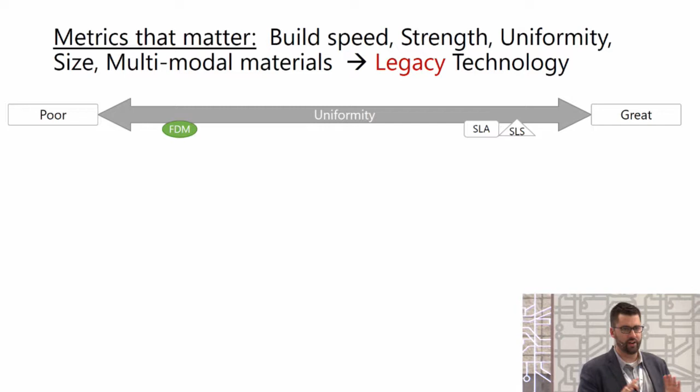So how do we prove that it's useful, and what are the advantages of FDM? We've ranked a few of the primary industrial 3D printing technologies on a spectrum from not great to great. So we look at FDM, SLA, and SLS. There are other technologies out there, and a lot of them are really great, but these are the big ones, especially in the polymer space, so that's what we're going to talk about today.

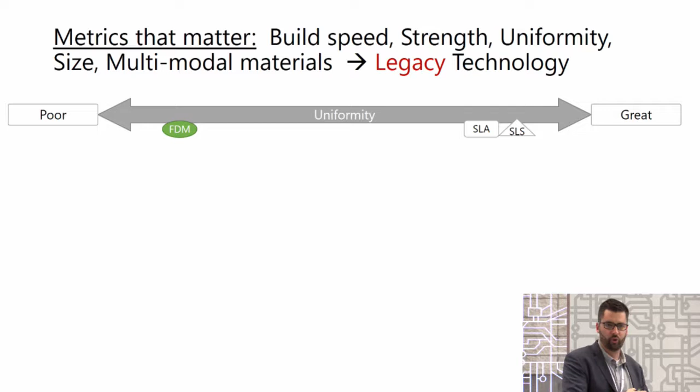Let's start off with uniformity. When I talk about uniformity, I'm talking about whole part uniformity. You can start out with a really strong material like carbon fiber filled polymers, but if that joint's not very strong, then it almost doesn't matter how strong the base material is, because your part is not very uniform. These other technologies have gotten a lot more advanced in their ability to produce a more uniform part. I'm not going to call it an isotropic part because it's not, but it's more uniform.

Then there's a host of other metrics that the industrial user really cares about, everything from strength of the raw material through to improved resolution, multimodality materials, build speed, and print size. I've ranked the technologies as our worldview, how we look at the additive manufacturing world. So FDM's pretty good on a lot of those.

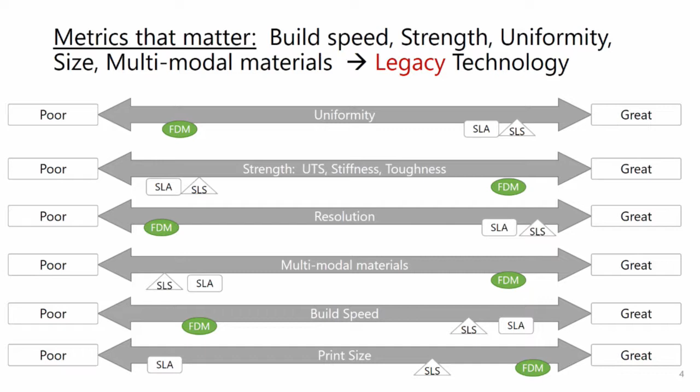If only we could get that uniformity up, then I could print structural parts. I could print engineering grade parts with engineering polymers that are used in injection molding and other processes with FDM additive. Wouldn't that be nice? For us, functional strength means isotropic parts in the whole part. I'll tell you how we're able to do that and what it also means for ESD and EMI.

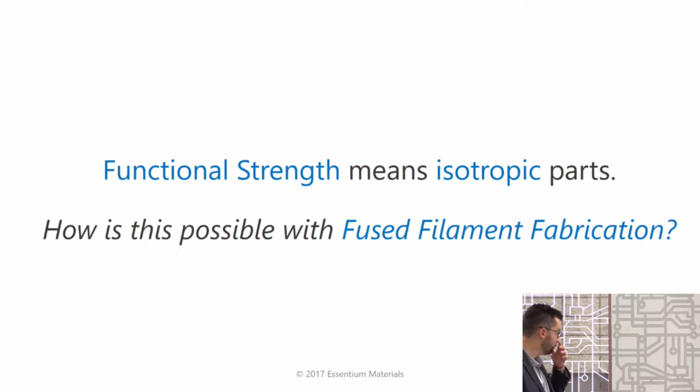But to start off, what I'm going to do is show you a little video of FlashFuse, what FlashFuse is and how it works. And that'll explain how it's possible with fused filament fabrication.

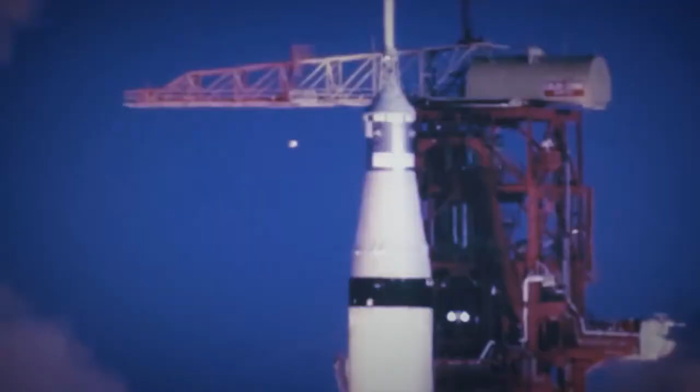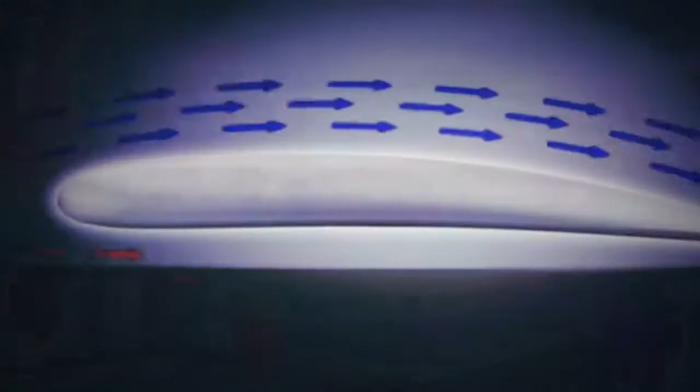History has always been driven by invention. From the making of fire and the design of the wheel, to the Gutenberg press and the cotton gin. From Thomas Edison's light bulb and the Wright brothers' first flight, all the way to the miracle of landing on the moon. None of it could have happened without imagination, a good amount of courage, and the belief that things can be better, that nothing is impossible. The greatest inventions to transform the world didn't just happen overnight. They each suffered through thousands of failures, mistakes, and missteps, until that one day when somehow the magic happens. Edison finds the right design of an incandescent bulb. The Wright brothers found the perfect balance to control an aircraft, and a new world of possibilities was born.

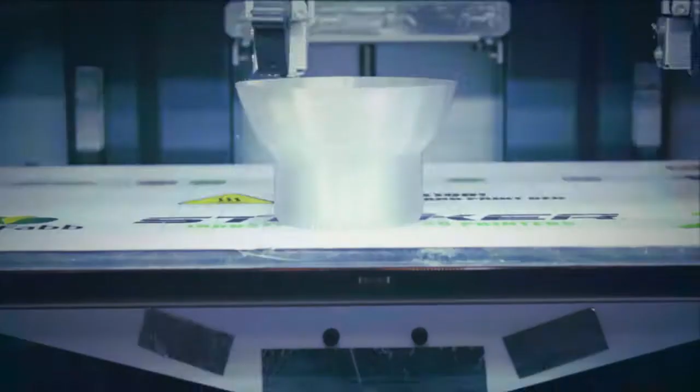Today, we stand on the cusp of the next industrial revolution, driven by the invention of 3D printing.

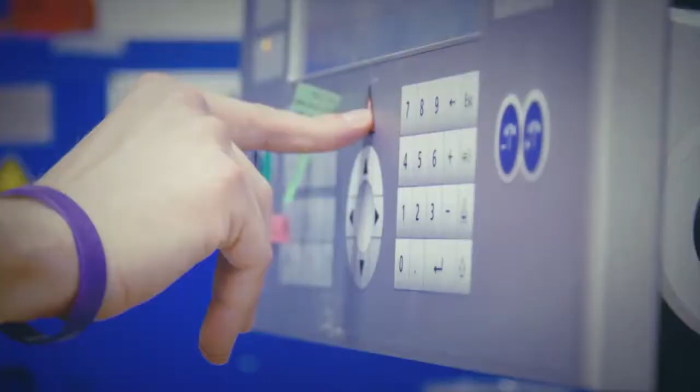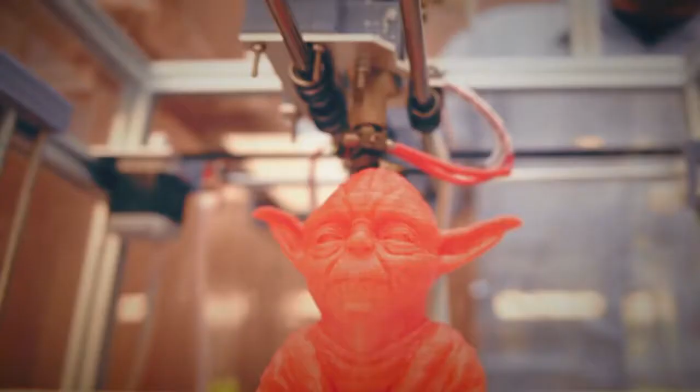In the world of 3D printing and manufacturing, we've got our own set of obstacles to face. One of them is structural strength. With 3D printing, you're laying down thousands of layers of material. Often with more complicated designs, interlayer strength just plummets. Until we solve this problem, 3D printing is doomed to remain relegated to weak prototypes and trinkets like Yoda heads and Eiffel Towers.

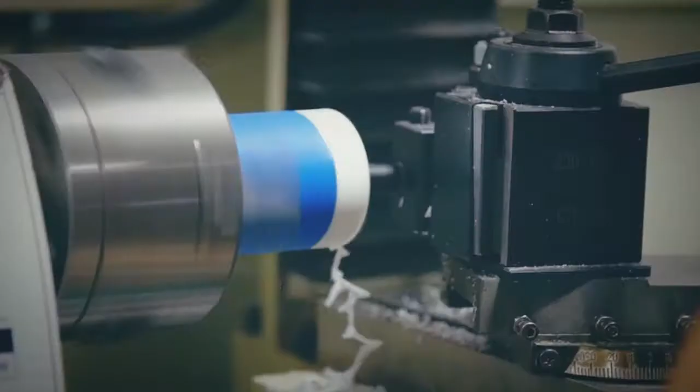So how's it work? Well, it's a two-step process. First, we coat the filament with a thin layer of highly conductive carbon nanomaterials. Next, using our patented flash fuse technology, we use electromagnetic waves to excite the particles in that thin layer, causing

the layers to react and heat up rapidly. This heating allows the layers to weld together. So what does this mean? We now have the ability to weld an entire printed part together during the printing process, achieving up to 98% the strength of an injection molded part. No post-processing, you take the part off the printer and it's ready.

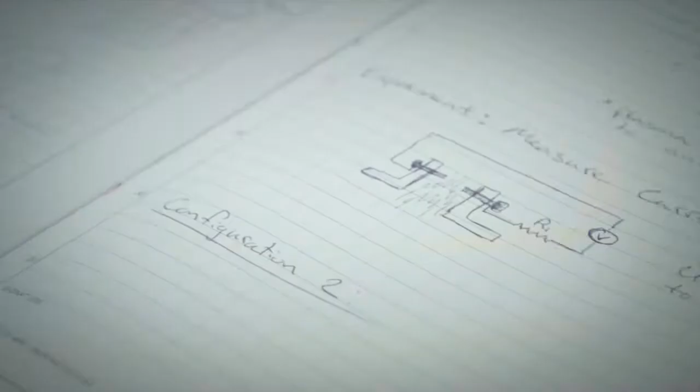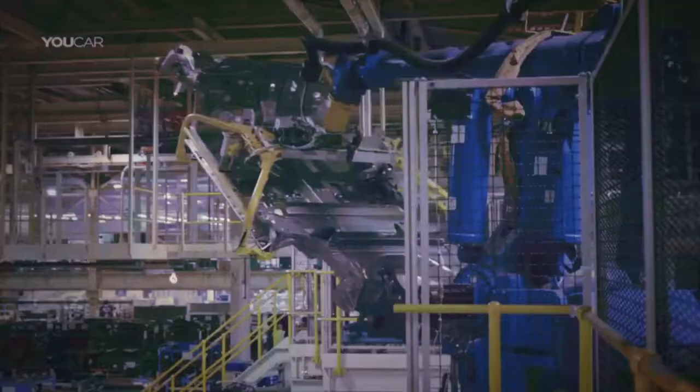We provide a new level of strength never found in a 3D printed part before. Isotropic properties comparable to those in injection molded parts. The uses of our product are game changers for the automotive, aerospace, medical, defense, and petroleum industries, all of which depend on practical parts that must be used in production. The future is here. The possibilities are endless. So let the revolution begin.

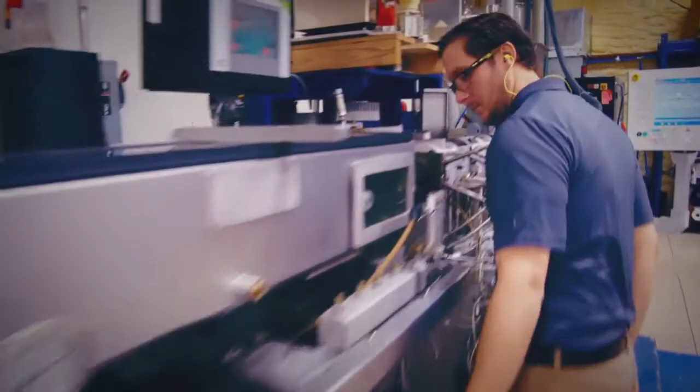All right, so now that you've seen it in kind of graphical form, how does it really work? That's probably the next question. Again, we're addressing kind of this age-old problem facing FDM printing. And that is, particularly under fatigue or impact loads, those poor interlayer bonds don't produce a strong enough weld in between all those layers. So again, this has limited the application for FDM additive, and it hasn't been able to really achieve the potential offered by the materials that FDM additive can really capitalize on.

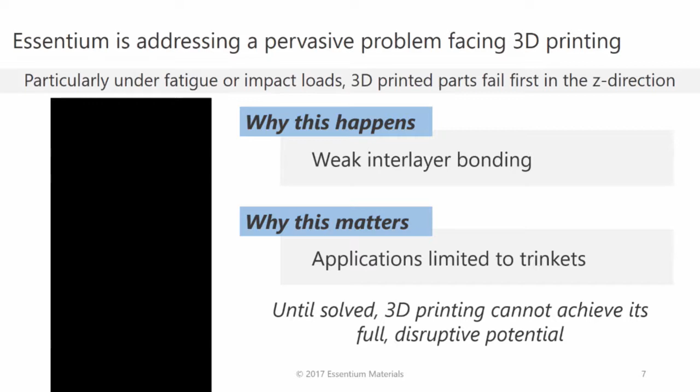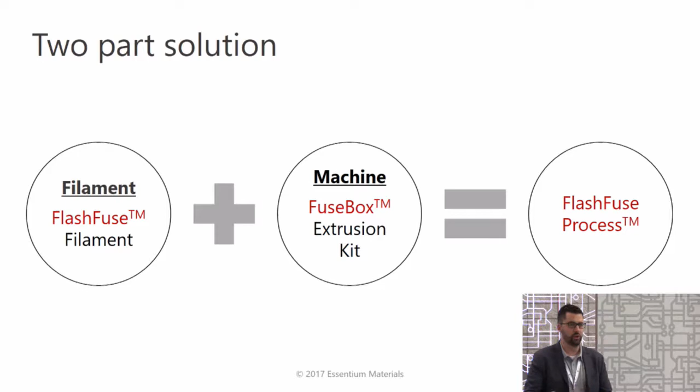So our solution is a two-part solution. One, we start out with a whole lot of material science. We make those materials electrically conductive, which allows the ESD and EMI shielding applications, and also provides the fundamental underpinning for the mechanical property improvement. And then we add that FuseBox technology. It's just like a chipset that goes into a computer. The FuseBox goes into the printer, and it unlocks that mechanical welding capability.

So let's start with the materials. We take monofilament, kind of in the upper right-hand corner. We coat it with a carbon nanomaterial composite coating. The polymer matrix is the same as the base polymer. And then we 3D print a part, and so you're looking at a nozzle cutaway here. And so the polymer just goes through extensional flow, and you don't get a lot of mixing in between the outer layer and the polymer core.

So this is really important for two reasons. Number one, all the mechanical properties that you sort of have in this core here, whether it's just neat, unfilled resin, or even carbon fiber or glass fiber filled polymers, all those mechanical properties are maintained. They're not interrupted by nanotubes. And then the second thing that's really great about that is it keeps your costs down, because all the expensive materials, the carbon nanomaterials, they're just used on the outside in a very thin film.

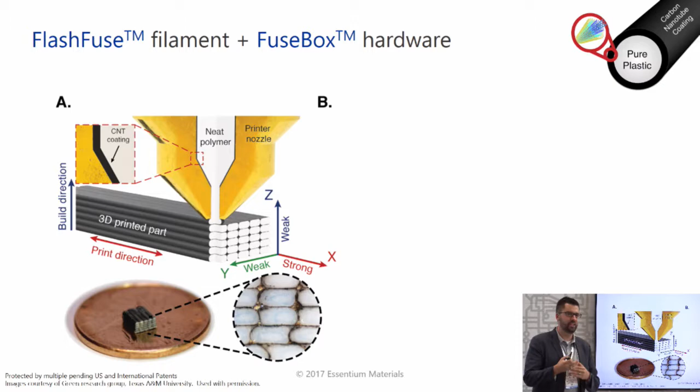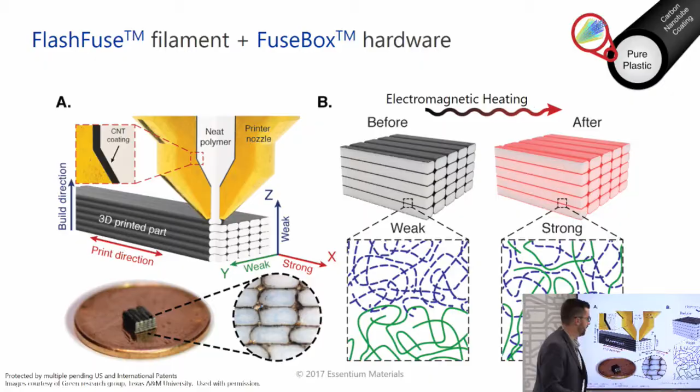So then you can see, even from very small parts, when you take a cross-sectional view, we do not get mixing. So our carbon nanotube composite stays highly segregated from the inner core of that plastic filament. And then while we're printing the part, again, you're building the part up layer by layer, trace by trace, just like a conventional FDM process. But these polymer chains, they were formerly just resting on top of each other because they didn't have the thermal energy to entangle. Now they got the thermal energy right at the interface so that they can cross that layer boundary and entangle.

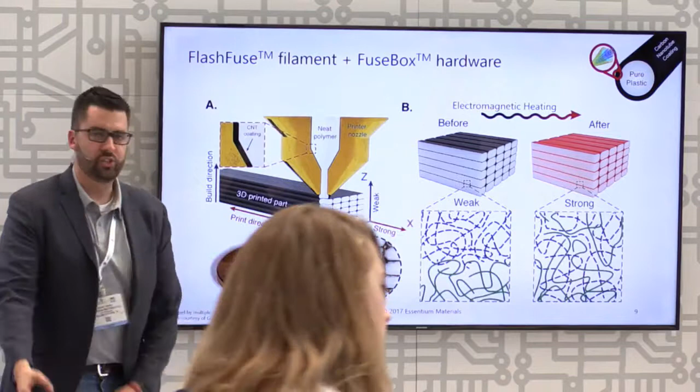This promotes interlayer strength, dramatically increasing the whole part isotropic properties. And here's the secret sauce. This is why this works. This is why this is special.

Our electrical conductivity is 1 billion times higher than the next closest commercially available electrically conductive filament. Let me say that again: we're 9 orders of magnitude more electrically conductive than the next closest conductive polymer available on the market. We've used 4-point probe tests, measured printed parts and filament, and this is why our technology works, because the electrical conductivity is so much higher.

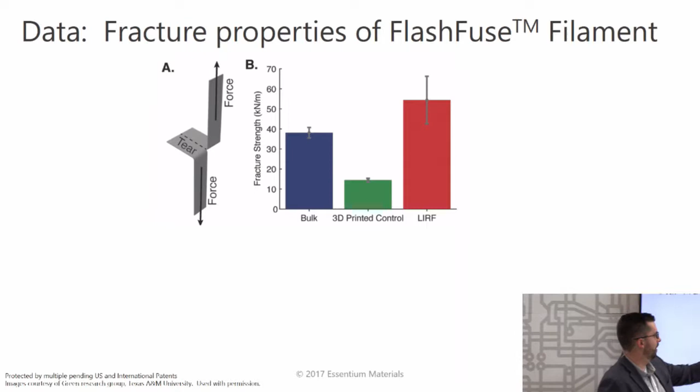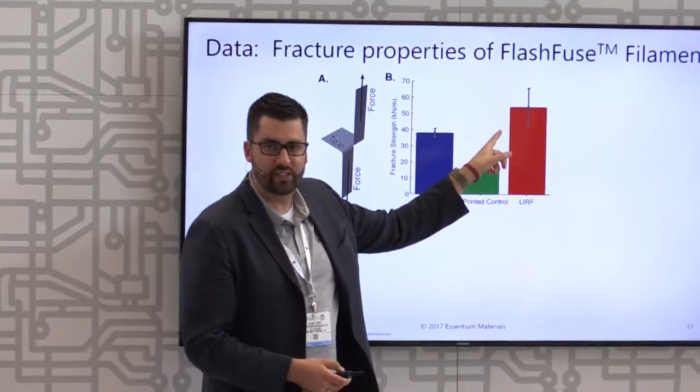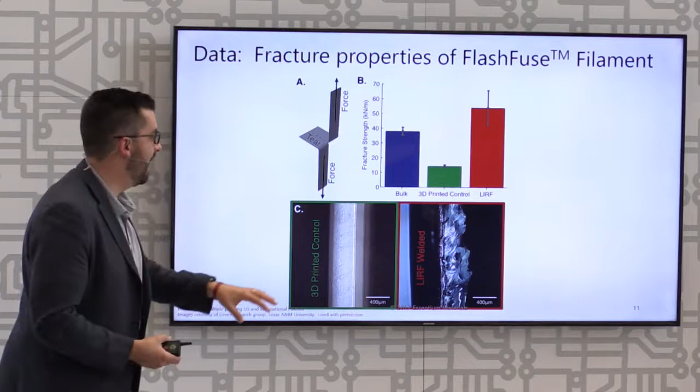So what does that mean for mechanical properties? We look at the mechanical properties between the joint from a fracture toughness standpoint. Bulk polymer has fracture toughness right in this range. 3D printed parts dip quite a lot because of that really poor weld. With our local process of introducing heat at the joint, we get not only improved fracture toughness, we get a taffy type failure. You get increased ductility, increased strain at break, and a dramatic improvement in the whole part isotropic properties.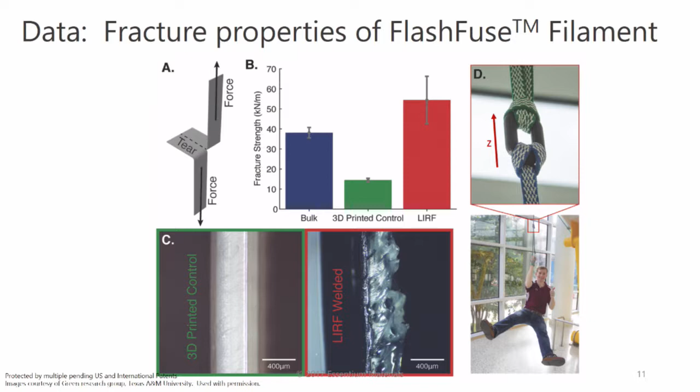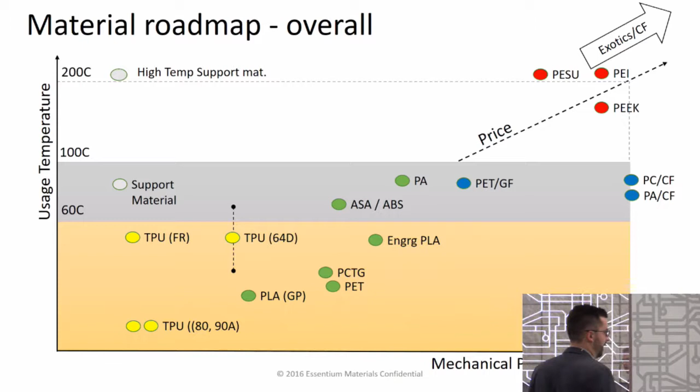So what materials can be used in the process? This is where this gets exciting, guys. It's not just one material, not just 6, not just a couple—it's an entire spectrum. If you go across the right-hand side here, you're looking at mechanical properties increasing. Looking at usage temp, you've got 60C, 100C, 200C, and beyond.

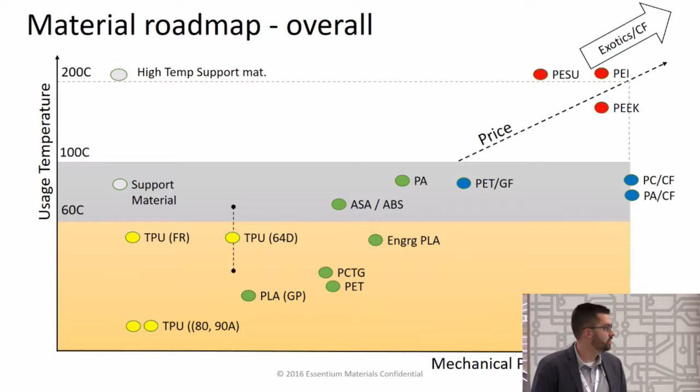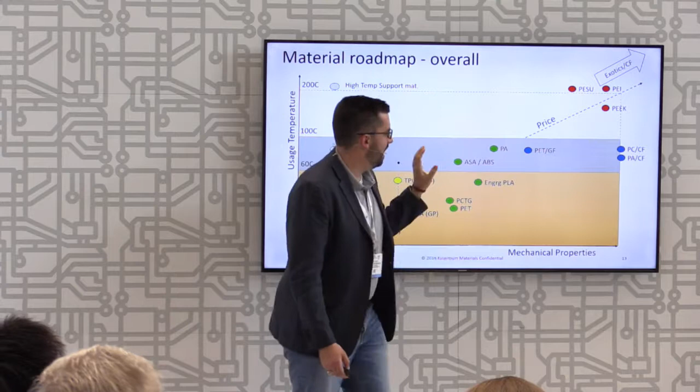Our process works with any thermoplastic polymer because the physics translate. We've got polymers we're working on that are urethane, elastomeric polymers, in 80 and 90 Shore A, 64D, and a really cool flame retardant grade that's already been aerospace certified. Then we've got copolyesters, natural polyesters, styrenics and polyamides, all the way out to glass fiber, carbon fiber filled polycarbonate and polyamide.

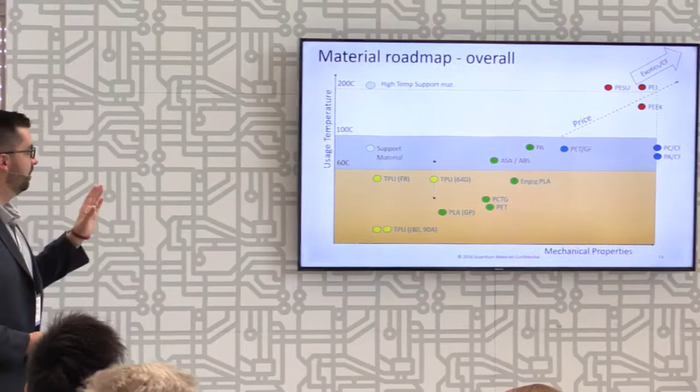And then you start getting into your exotic materials. This is where it gets interesting: PEEK, PEI, PESU, PPS—all those materials can be carbon fiber filled and then carbon nanotube coated, and the entire part can be so much stronger than ever was possible in the past.

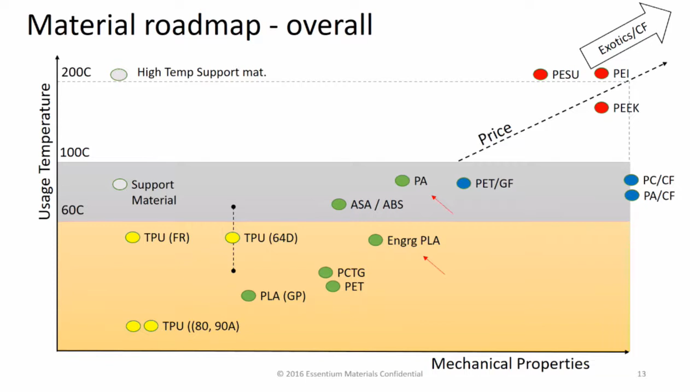The two materials we're launching with are polyamide—a really nice ultramid material from BASF—and an engineering grade PLA that can be heat treatable and used widely in a whole lot of printers at fairly low cost.

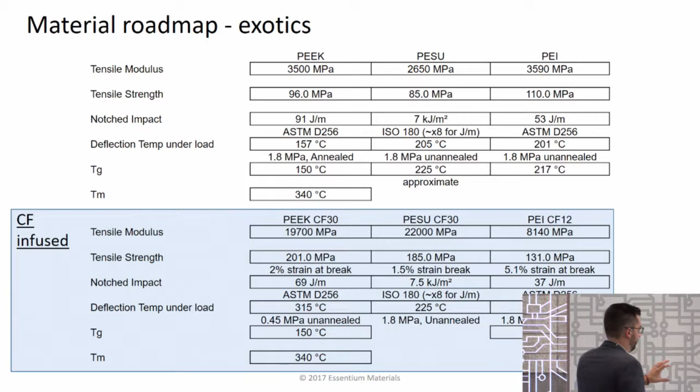So check out these mechanical properties for exotic materials and carbon fiber infused options. You've got PEEK, PESU, PEI, and you can start to have access to tremendously high mechanical properties.

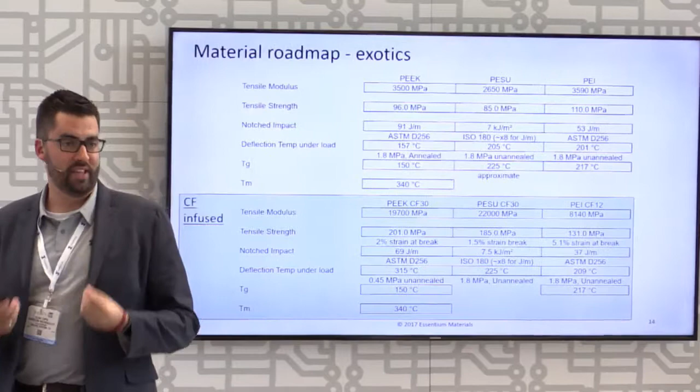By promoting the part isotropic conditions, a whole new realm of metal replacements is absolutely possible using this technology. Once we start looking at ways to dramatically improve the uniformity of the materials, FDM starts to become interesting and competitive, if not exceeding, other 3D printing technologies.

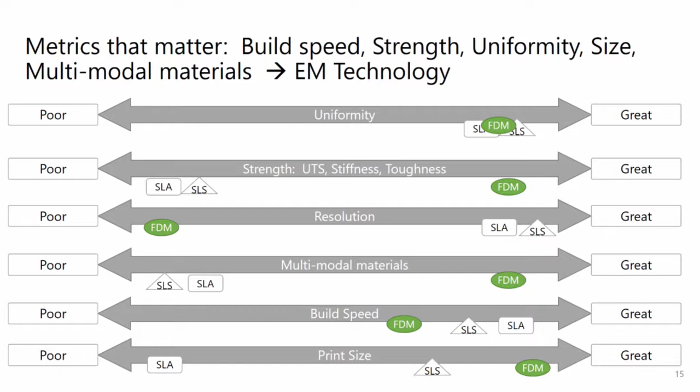In addition, our build speeds can increase because we're preheating, heating with the layer of filament, and post-heating with that plasma-based system. So, use cases.

Let's talk about what this means for electrostatic discharge and electromagnetic interference shielding cases. First, let's talk about what causes ESD events.

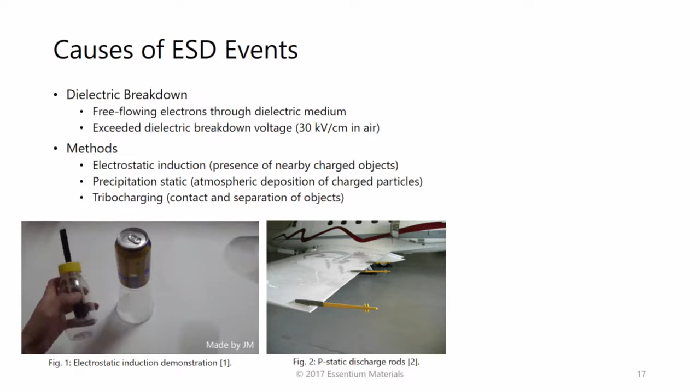ESD events are caused by dielectric breakdown, either in the air or in the polymer or in whatever material comes in contact with an area of charge buildup. This can happen when you're walking on carpet or across the floor—you can actually build up charge on your body in the kilovolt range, which is quite a lot. That's why that shock event can be harmful to you, to electronic components, and to machines, and you really have to have a dissipative material used in many applications to prevent this accidental discharge across the dielectric.

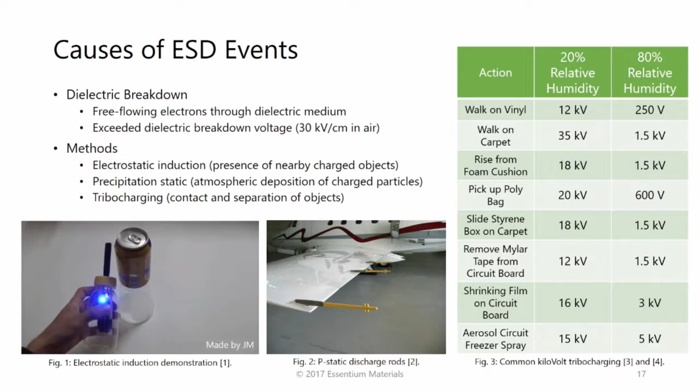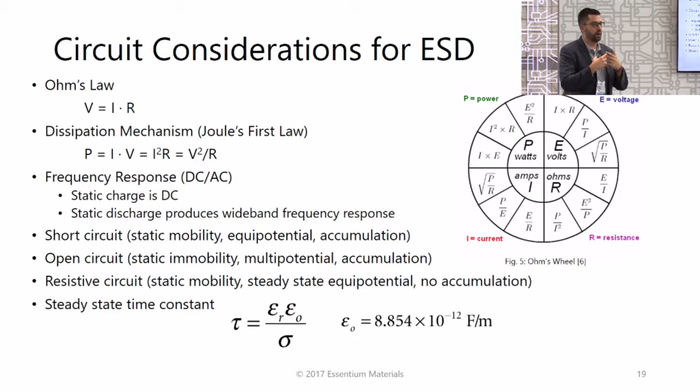All you have to do is build up that conductive material that can have contact, at first, with your conducting event, to dissipate the electrical charges even at really high voltages. ESD is governed by kind of like Ohm's laws, so you have a whole lot of equations - you guys perhaps know this better than I do, I'm a material science guy at heart. But the point is, we've looked at ways charge can be built up and how it needs to be dissipated, and our electrically conductive materials can dissipate that charge so much more efficiently than any other electrostatic polymer we've ever seen.

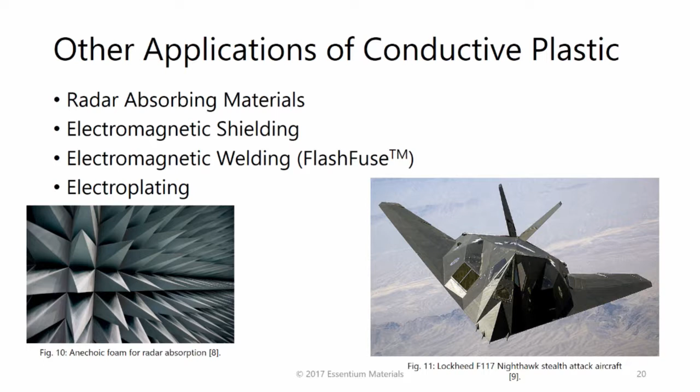Applications would include, outside of just ESD and dissipative ones, anechoic foam chambers, and polymer coatings used widely in aircraft applications and others. This is an interesting use case when you start to apply that polymer and weld it to itself, and potentially also to other structures.

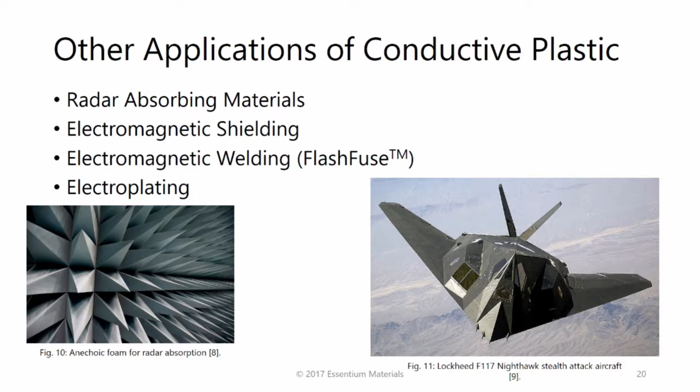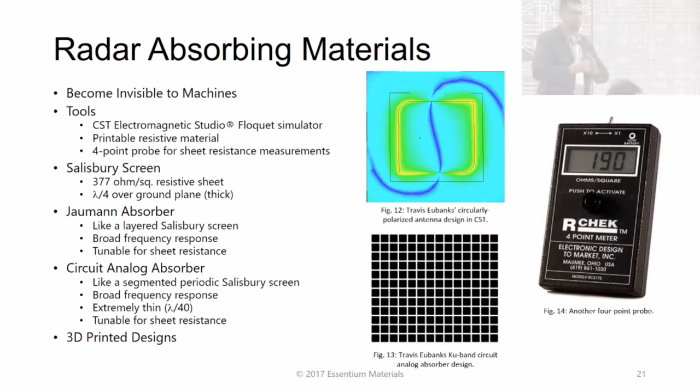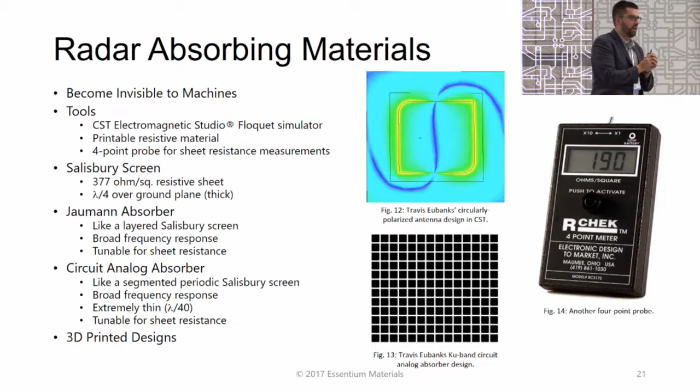Radar absorbing materials - it would be nice to make parts that could become invisible to other machines, since machines detect each other using radar. So if you can make that invisible, that's useful. These are some examples of radar antenna designs and other impact factors and mechanical structures that, if they could be 3D printed with a dissipative material, new design freedoms and packaging solutions become widely available, and you can eliminate fasteners by miniaturizing chambers and other structures to promote efficient designs.

Electromagnetic shielding is really interesting. Have you guys seen the videos from these Russian guys shooting with microwave guns? They were actually able to disable a vehicle on the road because they shot a microwave signal out and burned up some of the electronics inside. So maybe there are applications where you'd like to prevent long-range incidents from other electric signals.

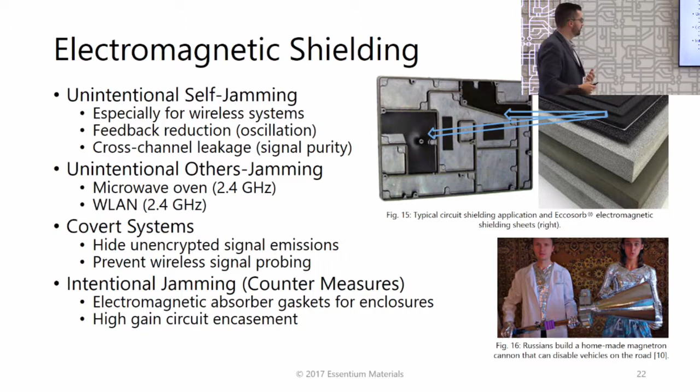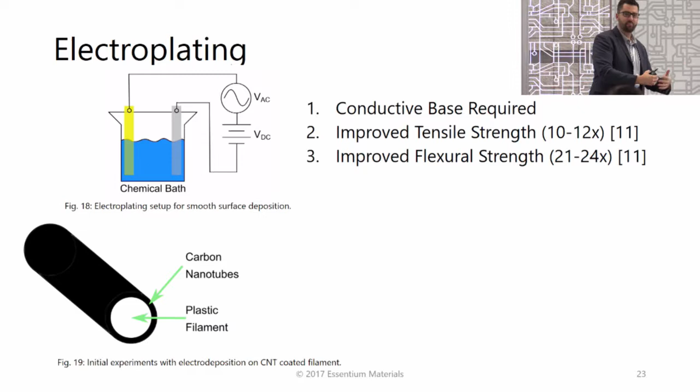So let's talk about electroplating for a minute too. Since our materials are so conductive, you don't actually need any other post-processing step before you're ready to apply electroplating to printed parts made with our materials. In fact, we've shown that both for filament and for printed parts, you can electroplate with copper and a variety of other materials very easily.

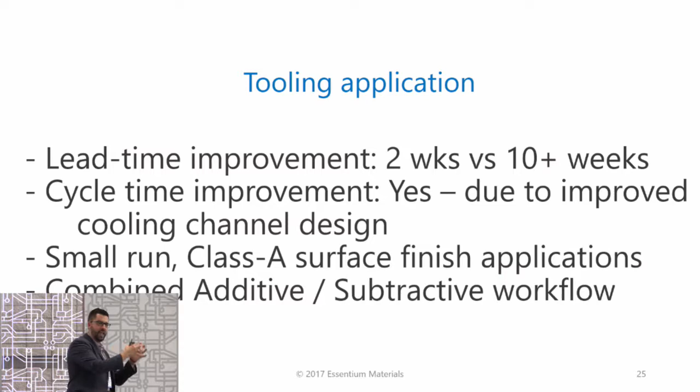Let's talk also about a use case for injection mold components in automotive. We got the question, can I make a tooling application for prototype tooling relevant using 3D printed tooling? The answer is yes, and here's some of the value props: we can cut the lead time down by a factor of 5, improve cycle time by designing cooling channels that are more circulatory in nature instead of gun drills with casting cores at 90-degree angles and other subtractive manufacturing techniques. And for small run parts that need Class A finish, incorporating an additive-then-subtractive workflow makes a ton of sense.

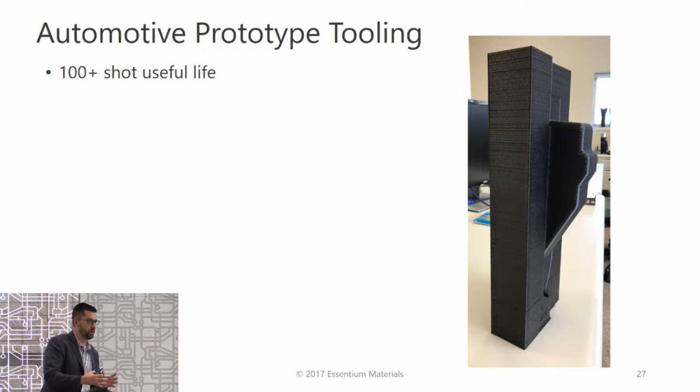So what we did was 3D print a near net preformed shape - a big part, 24 inches by 10 by 8, an 8 kilogram part, 100% infill. We're looking for 100 shots useful life, so this is for a prototype application or short run part. Really, the competition here is an aluminum tool, so if we can displace what would otherwise be a conventionally machined aluminum tool, that's a huge opportunity for additive.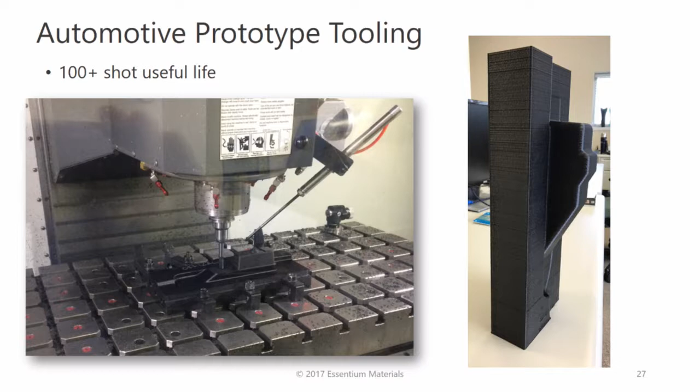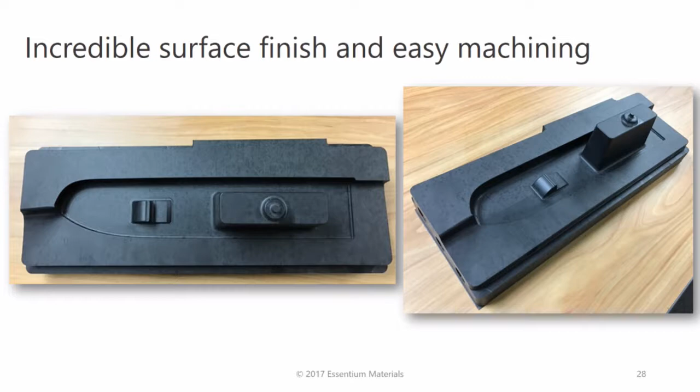We took that preform, put it on a CNC mill, cut off the first 1 or 2 layers to get down to that Class A finish, using the same machining parameters as you'd use for aluminum - the exact same parameters. We got a really nice Class A finish on this thing. Then we put it in a 450-ton press in Detroit, mounted it up - you can see it in the press there - and got injection mold shots right off the tool. This is an exciting application, still developing, and we're looking for other partners interested in this too. We see a really bright future for tooling applications with this flash fuse technology.

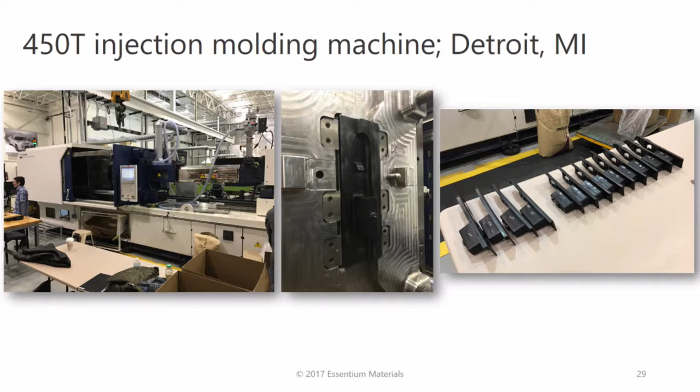So a bit about Essentium.

Who is this little company and what are they doing in this booth and at this show?

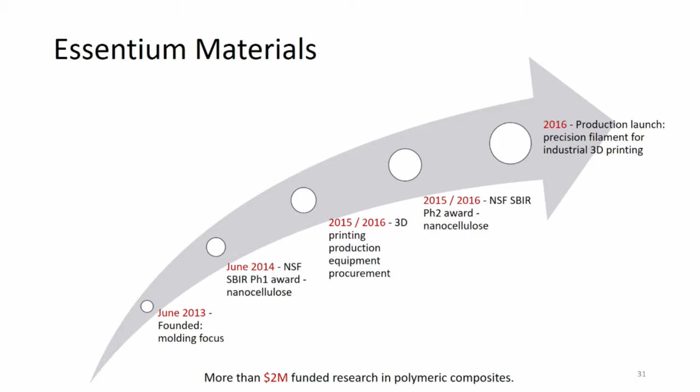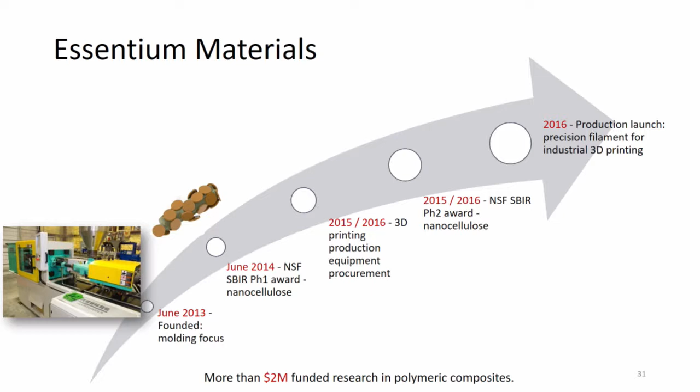Our company started out about 3 years ago, nearly 4 years ago now, with really an injection molding focus - polymer composites, biomaterials, and biocomposites. We got awarded an NSF SBIR Phase 1 when I was going through grad school, and then we started to productize, saying hey, we can make filament for 3D printing. We also started onboarding new technologies to make 3D printing much better. We got a Phase 2 award, and started messing with molecules a little bit, doing reactive chemistries and reactive extrusion in the barrel of the extruder. At the same time we also began to launch precision filament for the industrial and biomedical customer.

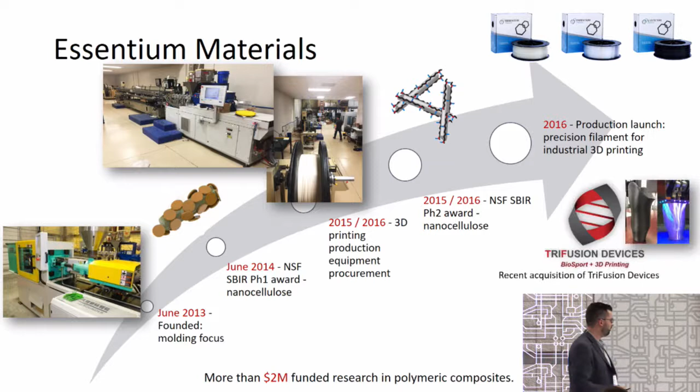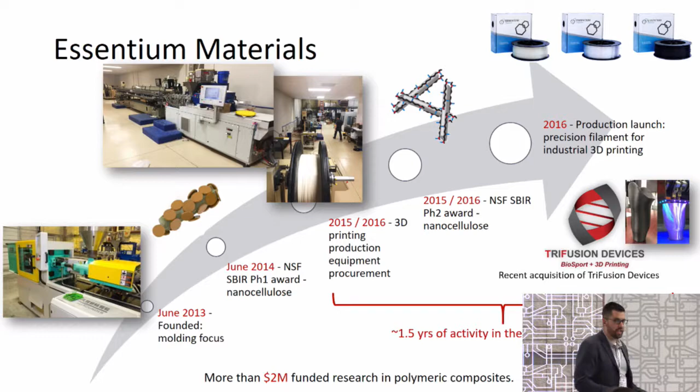Along that same period of time, we launched another company called Trifusion Devices that makes 100% custom, additively manufactured structural prosthetic parts - prosthetic sockets. We started it separately and then rolled it up into Essentium. So we've been in the additive space for about 1.5 years, working really on getting this flash fuse technology commercialized.

Essentium Materials is a vertically integrated company with manufacturing, analysis, mechanical property design, and final component manufacture. We're in College Station, Texas, a short hop away from the rest of the country. The team started out fairly small, and now we're at about 30 people. We're scaling rapidly and excited to launch flash fuse technology here at this trade show.

So if you're asking how can you be a part of this, we're taking pre-orders now. We have 2 3D printer companies with whom we're integrating this technology right here on the show floor. Stop by booth 1313 if you haven't had a chance yet - check out our plasma in real life. You can see it, hear it, and smell it, because it's plasma. Stacker 3D and Aeon 3D are both of our launch partners, and the entire system price is below $25K.